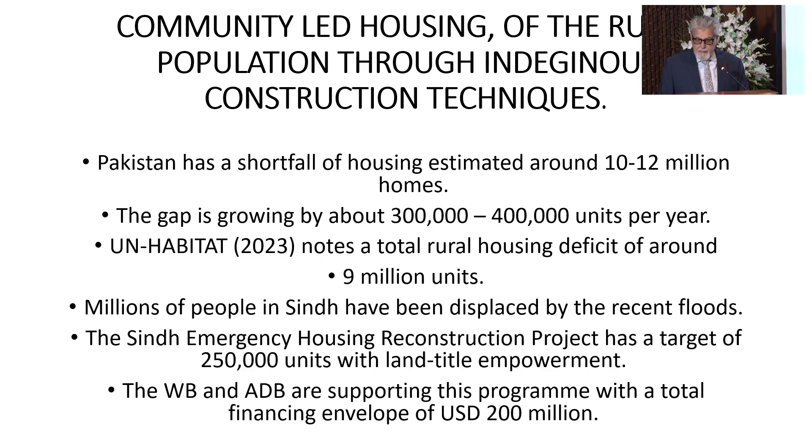As these figures show you, we are in a position in Pakistan where the housing problem cannot be resolved by either government or the private sector. It has to be resolved, if there is to be a resolution, by the people themselves. And that is what we do.

We try and train them to build in the way that they understand. I will come to it in a minute, but the basis of our work is to do with earth, the use of earth.

Please forgive me, a lot of these statistics that I'm showing you, most of you already know. It was intended that there would be more government officials here, and certainly more students. But whoever is here, it is intended for them, because most of you know the things I'm mentioning here. But really, it has become imperative, as far as I'm concerned, that we have to change our attitude.

We have to change the way we think. As far as my profession is concerned, we have to start to listen more than to say that we know the solutions. Because the solutions are there. We need to look for them.

And I'm constantly finding those solutions, not through my education, not through my workload, which I'm still doing, but when I talk to the people in the rural areas, and I've been doing this for the last 20 years, I'm amazed as to their knowledge. And why don't we listen to them?

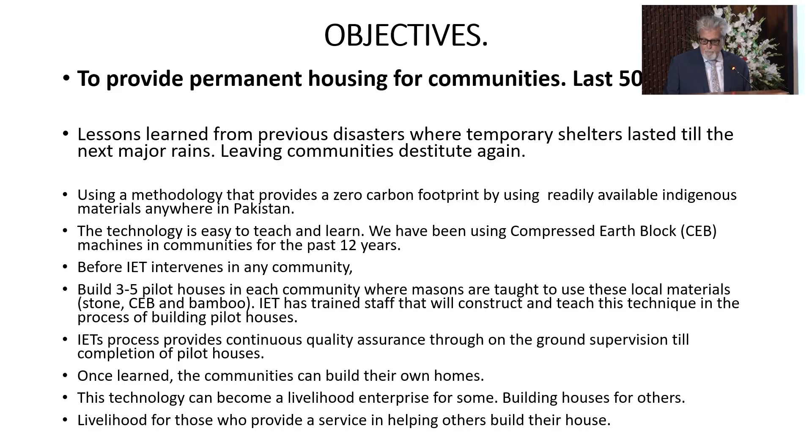A CEB machine costs about 160,000 rupees. It's made here in Pakistan. I've made mine in Karachi.

Interestingly enough, a lot of people don't know, but these blocks have a better PSI strength than concrete. Not only do they have a better strength ratio, their absorption of rainwater is much lower.

I haven't used any scientific techniques to measure the temperature difference, but I've used thermometers indoors and outdoors. From the buildings we made, we recorded around 15 degrees, and in some cases 18 degrees difference between the outside and inside temperature using this material.

I think you've read most of what I've put up on the board. I don't think I need to go past this, but I'm very keen in our organization to head toward a zero carbon footprint, both in my architectural work and in this NGO work. In my architectural work, I haven't really succeeded in making it zero, but it's pretty close. Certainly in the NGO work that I'm going to show you, it is zero.

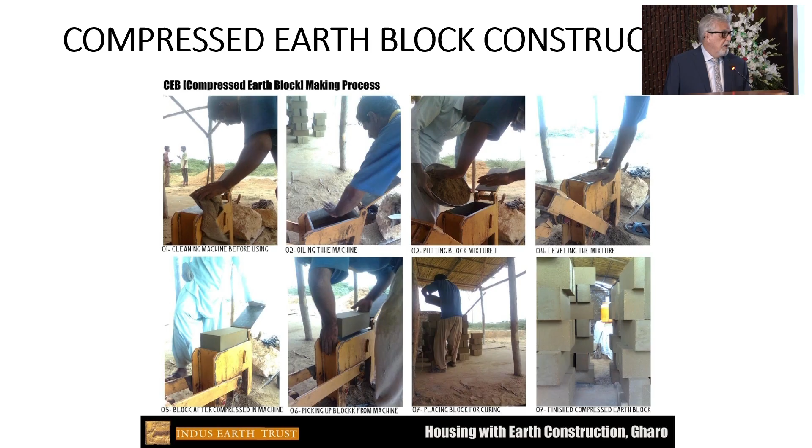We are actually building these in the Gharo wind corridor. As some of you might know, this is the area where all the wind turbines are being placed to provide electricity for the country. So you can imagine the wind that blows here is very high, especially during storms.

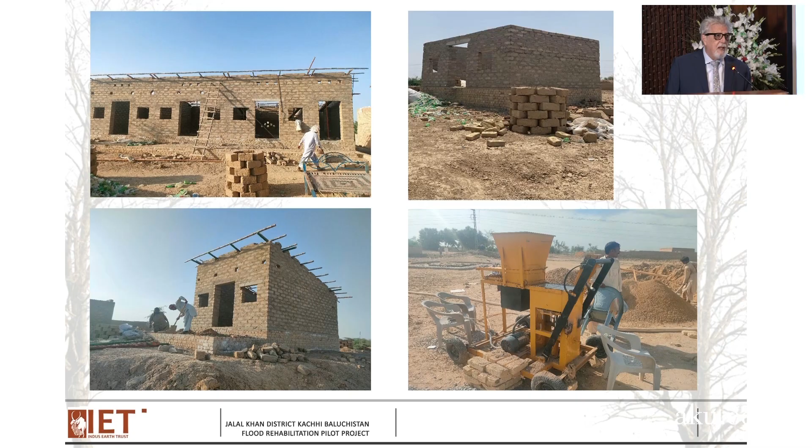This is the result of the building you just saw. We use lime plaster. The lime actually reduces the heat gain inside the building to a great extent. Here are some examples of the use of this material.

As I said, we are really training people to build their own houses, and I am convinced that is the route to take to help resolve the housing problem of our country.

The materials you need are cement, and not much, as I said, only 6%, a Panaflex sheet for waterproofing, and Bujri, which is the earth material. And the labor is your own, so it's free.

If we are to build, and I will show you examples of what we've done, the cost would be obviously much higher because we will be employing us as contractors. But now, over the last 15 years, I have noticed that these people we've trained are building their own houses, especially in Balochistan.

Here's an example of a model house that we built, 800 square feet, all using CEB blocks, stone foundation. It's 3 feet high to prevent flooding.

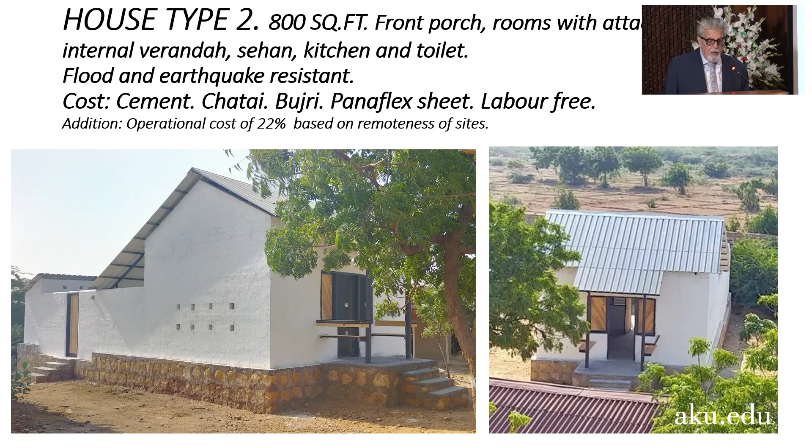And the roof was donated to us by a steel company. They wanted to experiment to see how it would work. This was a new product which we gladly used. But actually, in all our other works, in the example I showed you before, we don't use steel at all. This is the plan of the building you've just seen.

Talking about learning, we initially started building houses with 2 rooms, and I thought you'd have 1 room as a bedroom and 1 room as a living room. But we certainly learned that this is not acceptable to the communities. They only want 1 room - the entire family lives in 1 room.

They want to have a veranda, yes. And you can see - does this work? I'll use my own pointer. When you want something to work, it doesn't work.

You can perhaps see the main room where the beds are shown, and to the right is the veranda, and then what we call a sehen, which is an outside area - we call it a courtyard. This is the veranda, this is the main room here, and this is the sehen. Outdoor toilets, and an outdoor kitchen. I have seen many proposals being made by

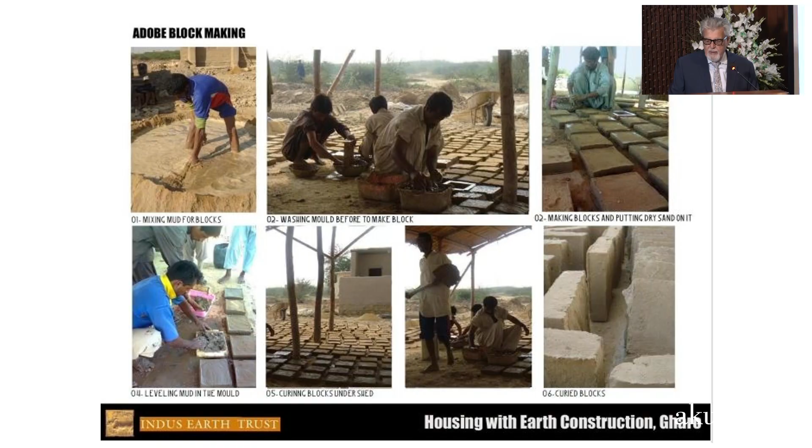This is being built - this is the two-room house, which we've now converted into a one-room. But it is adobe construction, and it has plastic sheeting on the top to prevent the heat from hitting the roof. Unfortunately, it was blown away by one of the storms that I mentioned to my colleagues earlier this morning, because they're doing the bamboo covering on the houses in Karachi.

This again - these are experimental houses. As I said, they are still standing. So as they say, the proof of the pudding. These, by the way, were built by the community. What we did - drawings are not understood by the community, and hardly surprising, so we made models, and the models were the ones that they understood and were able to apply.

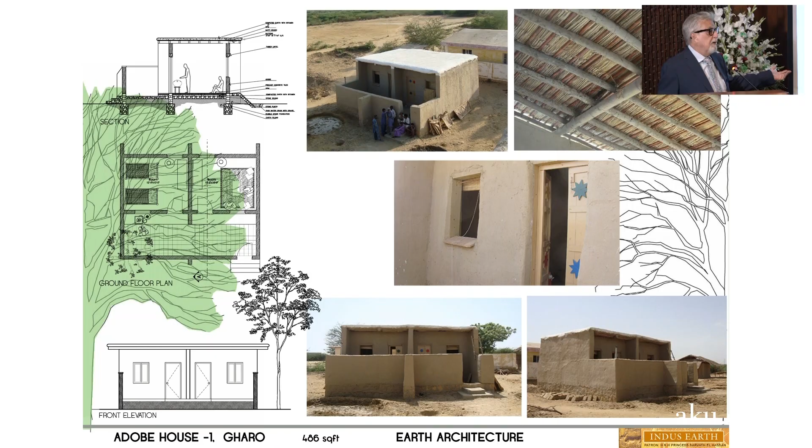You can see that the white roof, which is made of lime, is to reflect the sun's heat off. Because this was a part of the roof, all these materials are bought in the market. Nothing is imported. This is bought local timber, local bamboo, local chatai, as we call it. Even the windows and the doors are made locally. Now, we wanted to make sure that we didn't import anything from outside. When I say locally, these houses are built in a town called Gharo, which is about 1.5 hours from Karachi, east.

As was pointed out by Dr. Zahra yesterday, she has spent so much time in making a document that says that you can do it without the use of concrete. But then as she showed the example, it was ignored. Am I right? They just ignored it, and they built a concrete building next to one of the examples that you shown. And I think in front of you, I spoke to the government official, and I asked him, why do you ignore people who have spent so much time in doing research and coming with an understanding?

And he just gave me the usual political answer. I'm sorry, I'll just speak in Urdu.

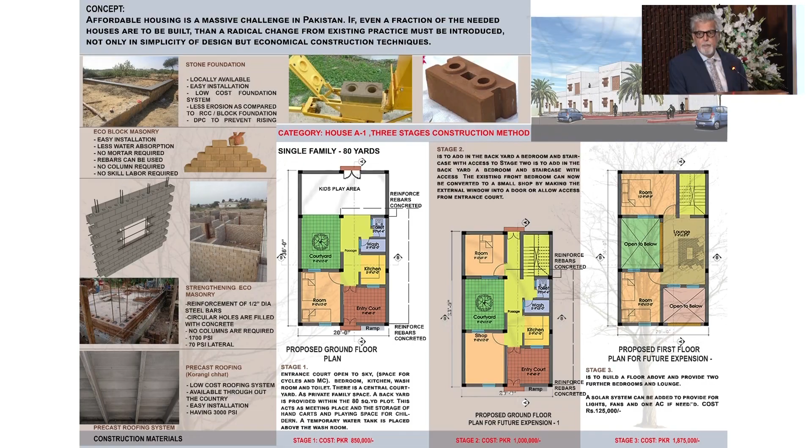And this is our impression of what it might look like. This is what it looks like. This is another example of the same, using similar techniques. This is an example of rammed earth.

We wanted to show that there is a way of doing rammed earth by the community themselves. This was something they did not know, something new. Here's an example of rammed earth in Nepal.

Here's another example of what we just recently completed in the rural areas, using compressed earth blocks, and bamboo as a material for the roof. The interior of this is 6 years old, or what it looks like inside. Bamboo has to be treated properly. The obstacles, there are no technical issues. The obstacles are not purely, but primarily psychological.

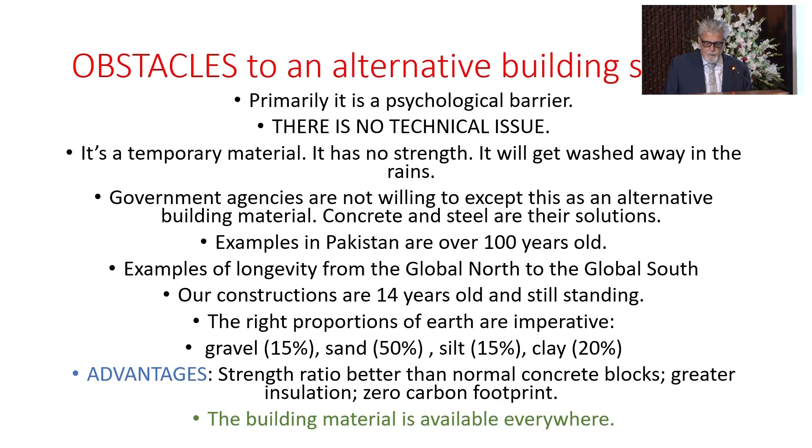Well, I've already mentioned the advantages. We did, I think, because of the floods, an example of what could be a floating house.

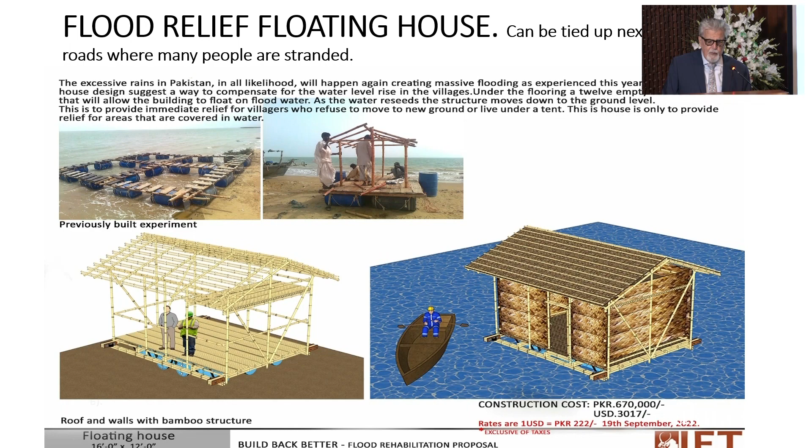I just want to very quickly show what we did in Kashmir, in the earthquake in Bagh, which is about 4,500 feet high. All our buildings were rejected by the government because we weren't using concrete. But we reused the existing buildings that had collapsed.

And if I can just show you, the earthquake issue is in the corners. The major issue is the corners, and therefore we really concentrated on that. This is the completed building, just using the stone that was available there.

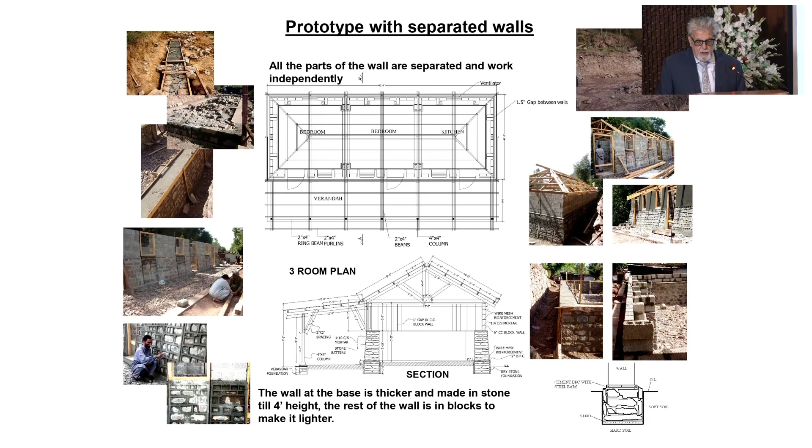Another type, that's what it looks like. Very simple design, nothing complicated, because the idea was the community will build themselves.

This is a very important slide I wanted to show, especially for those in a technical frame of mind. The stone was never placed in a way where it could slide off, but always placed so that if the pressure of an earthquake took place, the stones would move inwards.

Whether our examples work or not, as I've explained to many government officials, God forbid there is another earthquake, but we'll find out then. This is another example of it. Thank you very much.

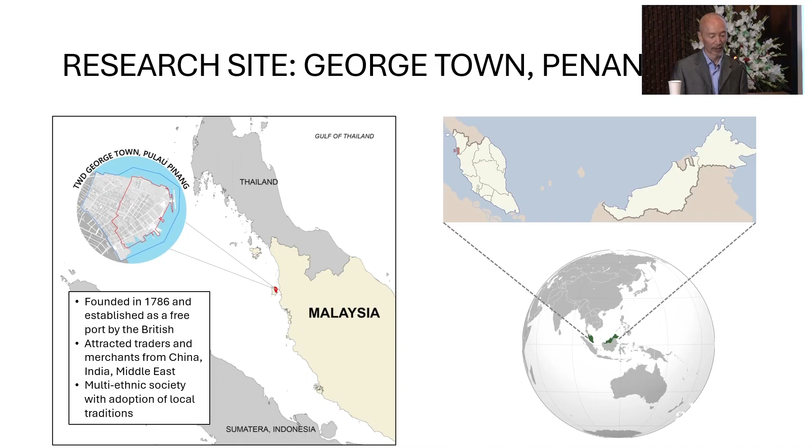And that was important when UNESCO listed George Town as a World Heritage Site in 2008. There were 3 main criteria that met: cultural diversity, the history as a historic port town, and of course the architecture and built form.

So our first problem here: there are two related problems, and Penang's problems are really also the problems more widely in Southeast Asia, as noted by the Intergovernmental Panel on Climate Change. Southeast Asia is going to be one of the three hardest hit regions in terms of more extreme weather events, flooding and heat waves, as well as the impact of rising temperature.

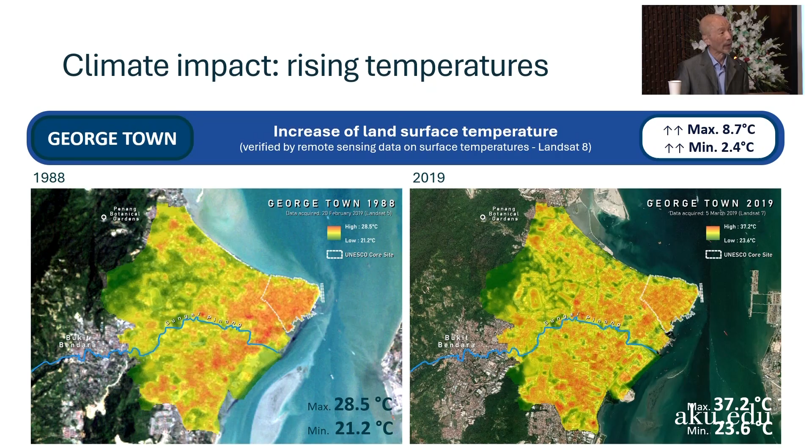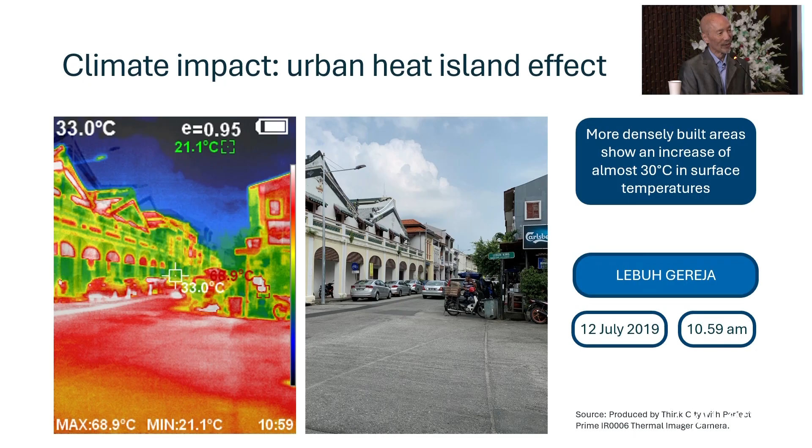I think what's really interesting here is that when you remove the trees and you have the urban heat island effect, the road temperature is 68.9 degrees. That's an almost 30 degree increase in surface temperatures. I don't think it takes a genius to work out what needs to be done if you want to cool down a city.

Now, when I talk to my friends in South Asia and they look at Malaysia, they go, wow, 30 degrees, 33 degrees, that's nothing when you're looking at 45 degrees upwards. But what I want to introduce here is the idea discussed earlier, of wet bulb temperature, which combines air temperature and humidity to indicate heat stress.

The way the human body works is that we sweat to regulate our temperature. The higher the humidity, the more we sweat, but up to a certain point, when the humidity is too high, our sweat can't evaporate, which means our body can't cool itself.

So what we have here is, if you look at 33 degrees temperature, and you look at 95% humidity down here, that really is the equivalent of 57 degrees Celsius, which is highly dangerous, and 35 degrees Celsius is really the threshold of human survivability.

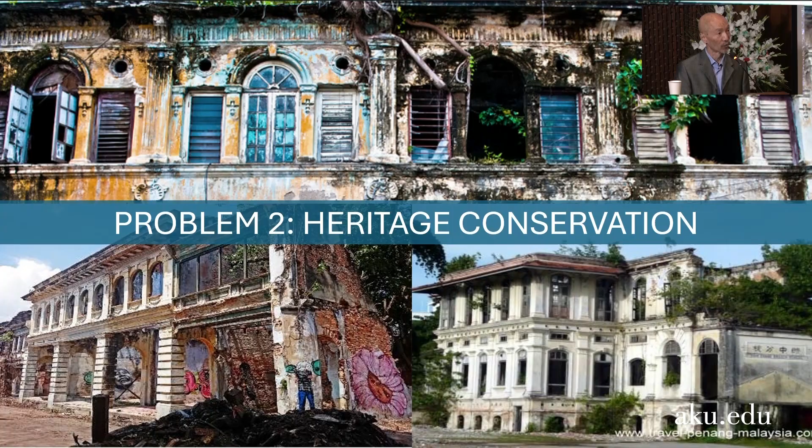This gives you a context of Southeast Asia and the tropics and why wet bulb temperature is very different from dry heat. So the second problem we have is that of decay and neglect in parts of George Town with a lot of heritage sites. The third problem we have is the availability and suitability of building materials to restore these sites.

Often building materials are not suitable because they're modern and not compatible — they don't breathe, for example. There's a limited choice, and where there is material available that is locally sourced, it's often not of sufficient quality.

So the project itself is funded by the British Academy. The British Academy, for those who are not familiar, is the UK's national funder for research in the social sciences and humanities. This particular fund was on culture, heritage, and climate action, hence the connection with harnessing heritage.

It's also part of the UK government's official development assistance, aimed at engaging with scholars, government, NGOs, communities, and other stakeholders to really come up with policy-relevant research and to embed these research findings. In this case, the aim is to demonstrate how culture and heritage can create opportunities to enhance climate adaptation and mitigation.

So now I need to show this slide because, as Anna mentioned, I'm a political economist, so I'm really a fish out of water here.

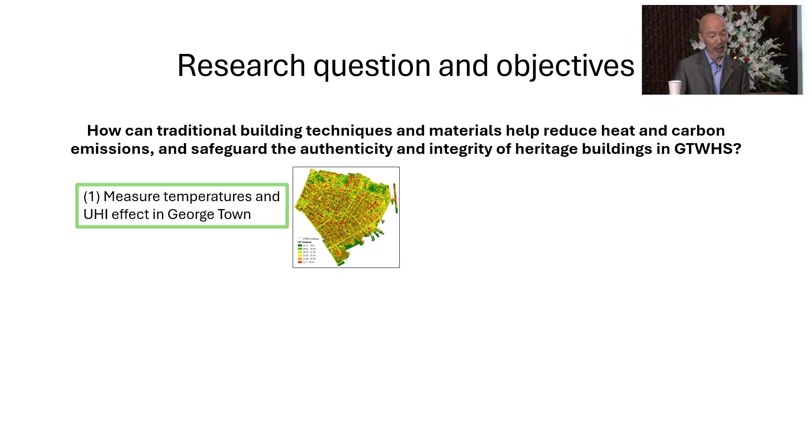To answer that, we've got 6 objectives in total. The first is to measure temperatures and the urban heat island effect in George Town. To compare the temperatures of traditional versus modern materials. Then we assess the carbon footprint of traditional materials - this is when the stuff goes to the lab. We document traditional building practices and whether this knowledge is still widespread or dying out. We identify challenges in adopting this by engaging with various stakeholders, particularly in industry. And finally, we assess the economic viability of traditional materials and techniques and how viable it is to propose this as a solution.

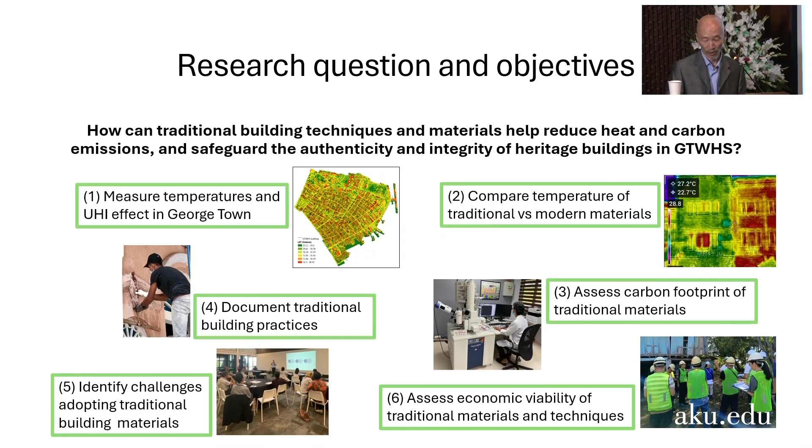This gives you an idea of the different components of each of these objectives. I'm just going to look at 3 findings - I'm not going to touch on the stakeholder engagement and focus group discussions. I just want to look at temperature and carbon emissions, traditional building practices, and economic viability.

I showed you some earlier heat maps of Malaysia, of Penang in George Town. What we have here is we were able to downscale the land surface temperatures and zoom in street by street. This gives us a temperature error of just around 1 degree in terms of residual errors, and also an accuracy within half a meter. So we can see here the hot zones in George Town - the map on the furthest right - has expanded in areas with recent development, and we can actually track this.

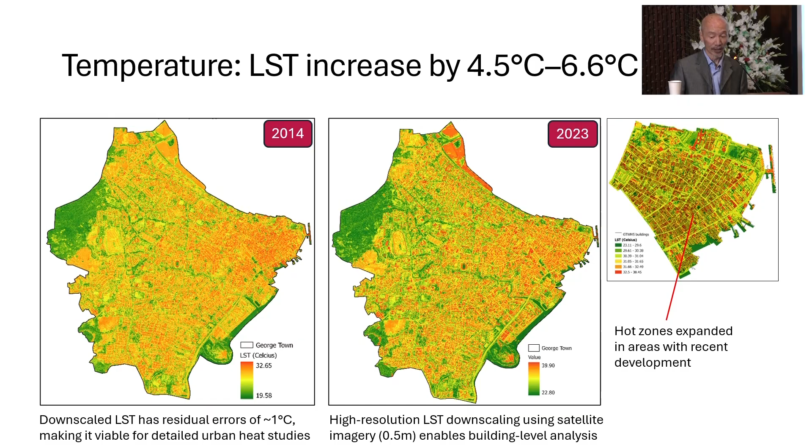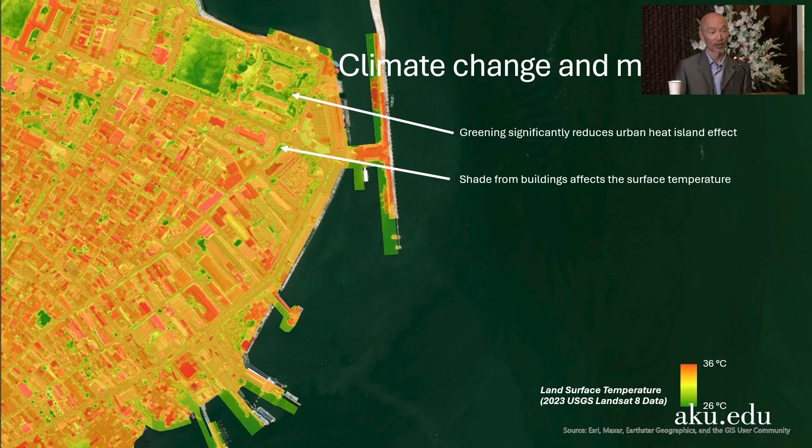Here you can see the importance of some of the issues I raised earlier from this more detailed map. You can see that greening significantly reduces the urban heat island effect. Shade from buildings affects the surface temperature. Interestingly, the asphalt surfaces, roads, were surprisingly cooler than rooftops - rooftops were where the highest temperatures were.

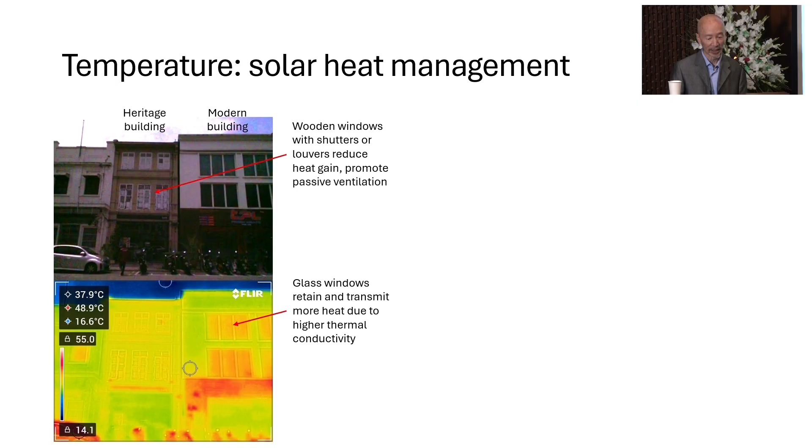So here, this is some thermal images of a heritage building in the middle and a modern building on the right. You can see from the heat map, the thermal camera, that wooden windows with shutters and louvers actually reduce heat gain and promote passive ventilation, in contrast to the glass windows that retain and transmit more heat due to higher thermal conductivity.

This one gives you - this was a restoration undertaken by Think City of a historic fort in Penang, Fort Cornwallis, a British fort, obviously. You can see we're comparing temperatures on the facade of storeroom 7 compared to storeroom number 8. Storeroom number 7 is legacy cement - previously it's been resurfaced with cement - and storeroom 8 is with lime plaster. You can see the green and the blue - blue is cooler than the green.

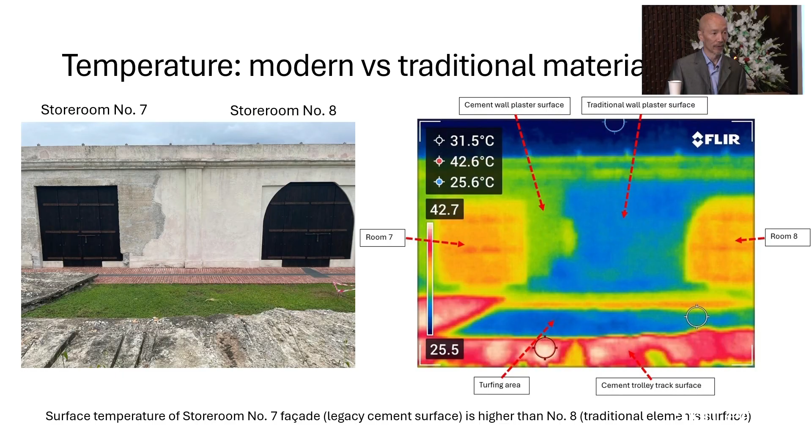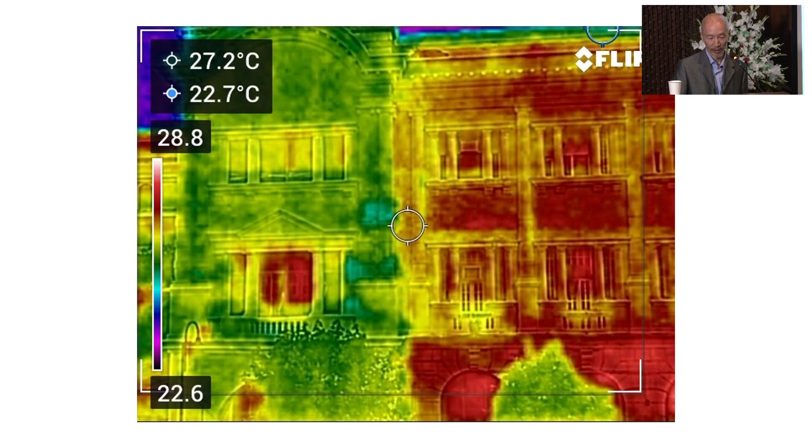Given the range of measures, it was not possible to capture this in one slide with all the various measures, which would be really confusing. So what we did was set the material that scored higher—in this case aerated concrete blocks versus clay brick blocks—at 100%, and the lower-scoring material was measured as a percentage proportion of that 100%.

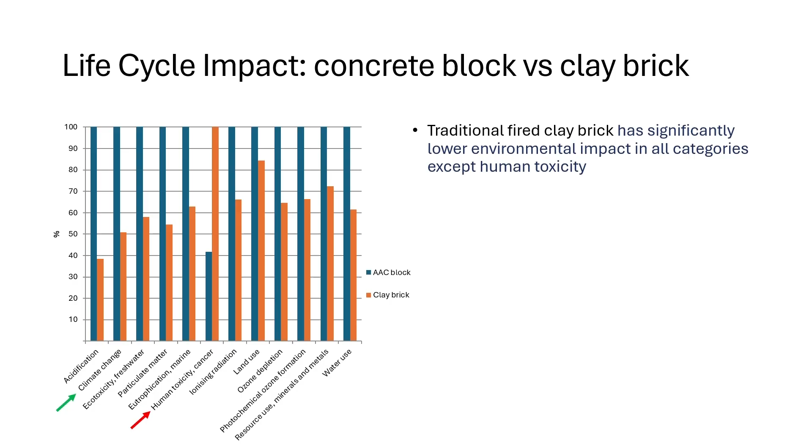What you can see here is that traditional fired clay brick has significantly lower environmental impact in all categories except human toxicity, shown in red. The key indicator, if you want to look at just one, is climate change, shown in green. You can see the difference: clay bricks are almost half the impact of concrete blocks.

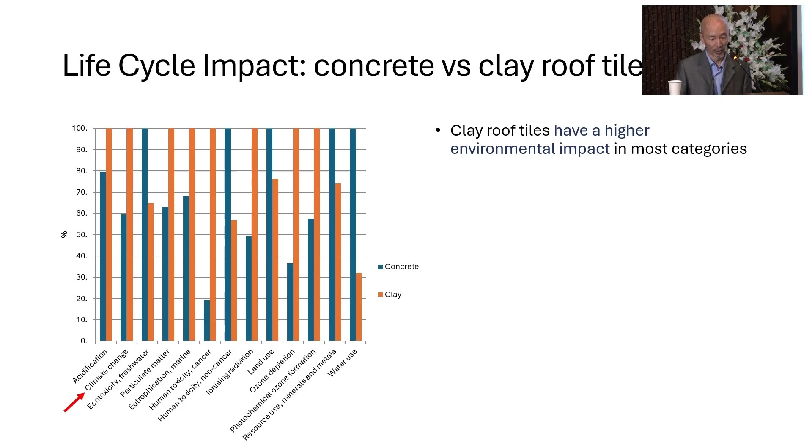Finally, and this is something we're still working on, clay roof tiles have higher environmental impact in most categories compared to concrete roof tiles. This was interesting to us, and the project is continuing—it's meant to finish in December, but we're going to extend it till March just to wrap up a few of these things.

After sampling and testing each building material and measuring them, we wanted to model this and simulate it. So we used a software called IES Virtual Environment Simulation, and we created a 3D model where we could input the various materials to get an indication of how this building will perform.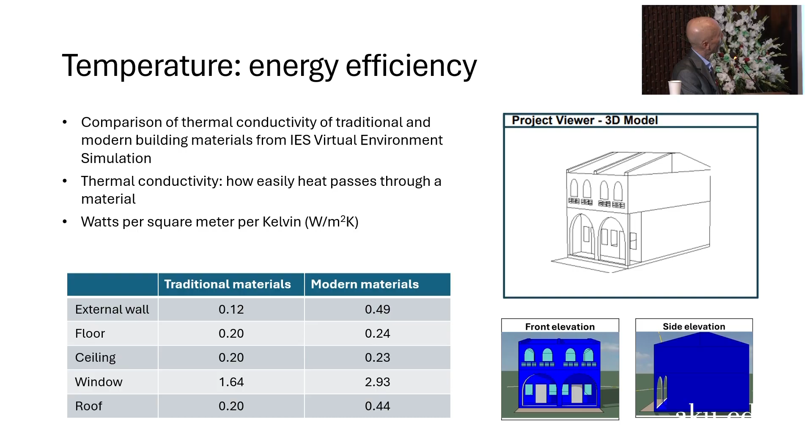Here's a summary of the U values, the thermal conductivity of traditional versus modern materials. The less conductive the material, the better it is at regulating temperature, preventing heat from outside coming in and heat loss from inside going out. In every instance—external wall, floor, ceiling, window, and roof—traditional materials have lower thermal conductivity than modern materials.

We can see the energy consumption is lower for the black curve, which is the traditional material, which only peaks at about 1.2 kilo British thermal units per hour lower than modern materials.

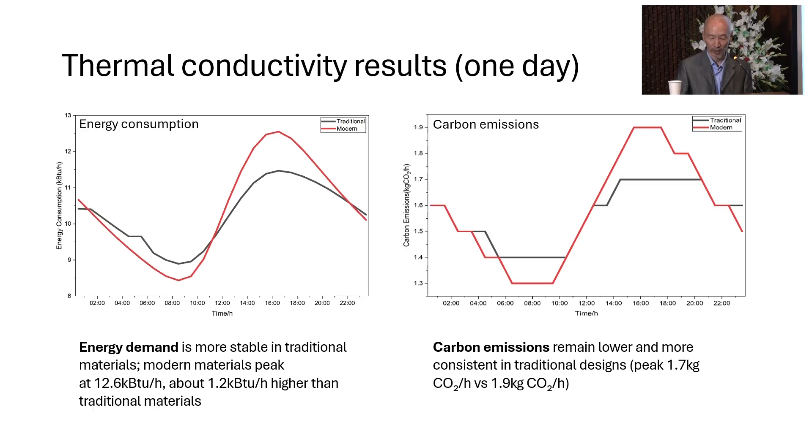For carbon emissions, this is key—the black line, the envelope, is much smaller than modern materials.

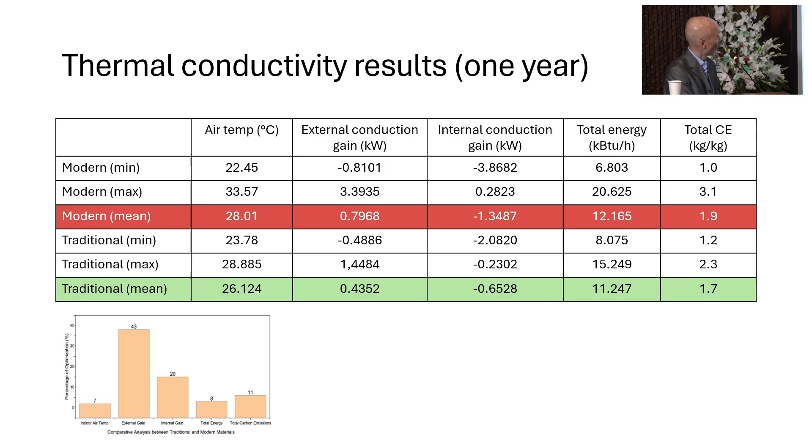Finally, we did a one year simulation—those earlier charts were one day. For the one year simulation, you don't need to look at the minimum or maximum, just the mean for modern and traditional across five categories: air temperature, external conduction gain, internal conduction gain, total energy, and total carbon emissions. In every case, traditional materials score better. This chart gives you an idea of the scale of improvement gained by traditional materials, the highest being external conduction gain at 40%.

So what are the challenges then? Obviously what we want to do is empirically record these things so we can take it to government to say these are the issues. We also conducted surveys, and the challenges fall into three categories: construction, governance, and finally institutional as well as local knowledge. The big problem, and hence my question about scaling up in the previous presentation, really is the higher costs.

That is always the big comeback, the big pushback by contractors, conservation architects, etc., that it costs more to use traditional materials, as well as there's a lack of skills. Traditional materials are also more time-consuming - you can pour cement on the floor and let it settle, which takes no time at all. With lime, for example, you need to flatten it. So more time means higher costs, and also workers lack practical experience.

In terms of governance, there's a lack of public sector capacity, a lack of policy enforcement, and lack of formal guidance by government. There's also the problem of safety regulations that prevent the use of timber, because the fire department in particular would not approve constructions from timber. And there's also the general attitude that having to comply with greener technologies, traditional materials, is just a hindrance to completing the project.

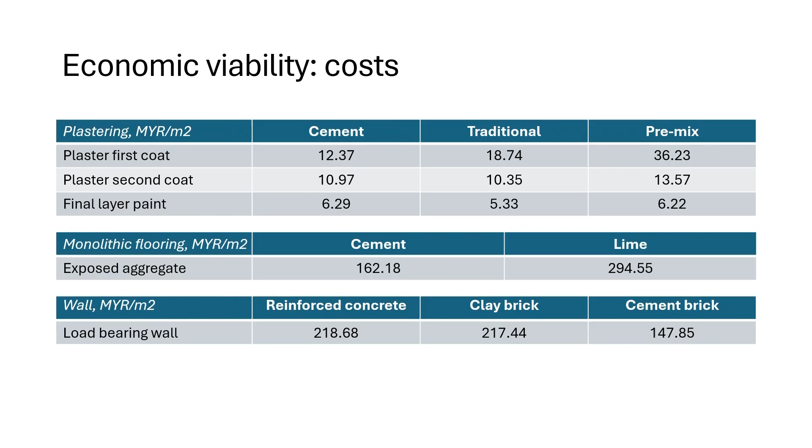Finally, we come to the data on economic costs, economic viability. This is the pricing per square meter in Malaysian ringgit, MYR. We've got selected costs for building - plaster coating in different layers, flooring, and load-bearing walls. You can see that although traditional materials are more expensive in some instances, in others they are very close, and in others yet, say the final layer of paint, they're actually cheaper. These premixes tend to incorporate more environmentally friendly materials, but also include cement, so they're not necessarily greener per se.

When it comes to load-bearing walls, you see clay brick is comparable to reinforced concrete, but once you compare cement bricks, then that becomes a problem. It doesn't make sense for any project to want to use clay bricks.

What we're doing right now, and this is where I come in, is trying to do the full economic costing, which covers the life cycle of materials. So building from cement bricks may be cheaper, but that's because the full cost of cement bricks isn't included in this price. That means at the end of the life cycle of the building, it needs to include the cost of the landfill, whereas clay bricks can be broken down and reused, or biodegraded.

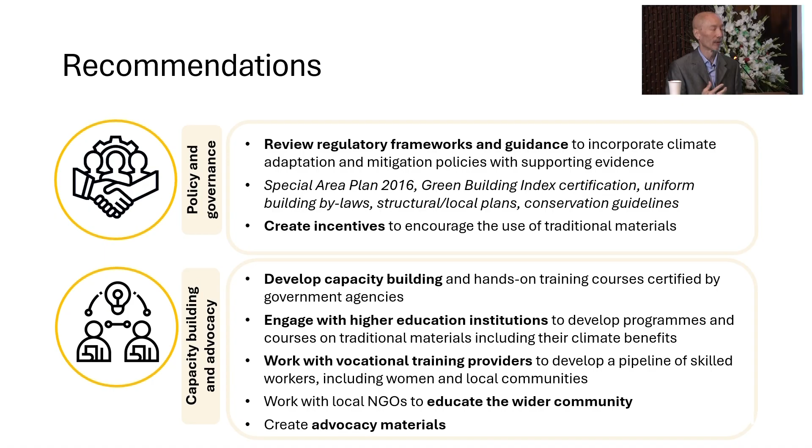Then, of course, the whole issue of capacity building and advocacy. I fully agree that things need to happen from the ground, but being an economist, I also think we cannot disregard government - I don't think any of us is saying that. In fact, the listing of George Town as a World Heritage Site was through the work of local community and government pushing for it, as a way to rejuvenate the entire city and make it a living, breathing city. And that's it. Thank you.

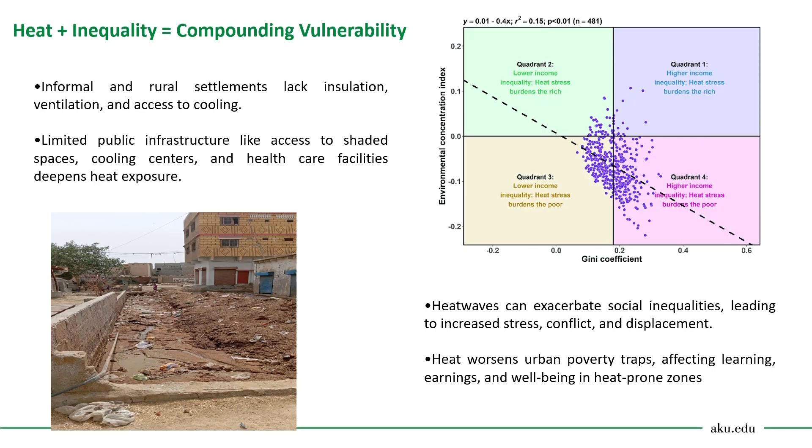I wouldn't spend much time here. We have been discussing since yesterday how heat waves are increasing in severity and intensity, and how Pakistan is one of the most affected countries in the world. On top of these increasing heat and climate hazards, the existing inequities that Pakistan has in terms of socio-demographic factors, poverty, and food insecurity all lead to compounded vulnerability, especially for the most vulnerable populations, which includes women, children, elderly, and outdoor workers.

When it comes to the context of Pakistan, the vulnerabilities vary both in urban and rural areas. In rural areas, people doing agricultural work as outdoor laborers don't have much shade. They work in peak summer times, especially in Sindh or Punjab, where the temperature goes as high as 45 degrees for quite a few days, and even in some regions touches beyond 50 degrees Celsius.

But the story is no different in urban areas, though it has its own challenges, because of how these cities have grown, or mushroomed, over the years. Especially in Karachi, single-story buildings have now become 3, 4, 5-story buildings without proper planning. The streets have narrowed, there is absolutely no ventilation, and on top of that, there is no electricity.

Professor Nausheen presented to us this morning the picture of Karachi, showing how these dwellings currently look - people living in 400 to 500 square foot apartments with no electricity, no ventilation, and especially women who are trapped in these apartments, and on top of that, they are also cooking during peak summer times.

As I mentioned, this is the SHAPES trial, and because we started our work in climate not very long ago - just 3-4 years - we are still learning throughout the process. As part of this trial, we had an exhaustive formative phase with various components, which helped us understand what could be done, or at least tried and tested, in both the urban and rural contexts of Pakistan.

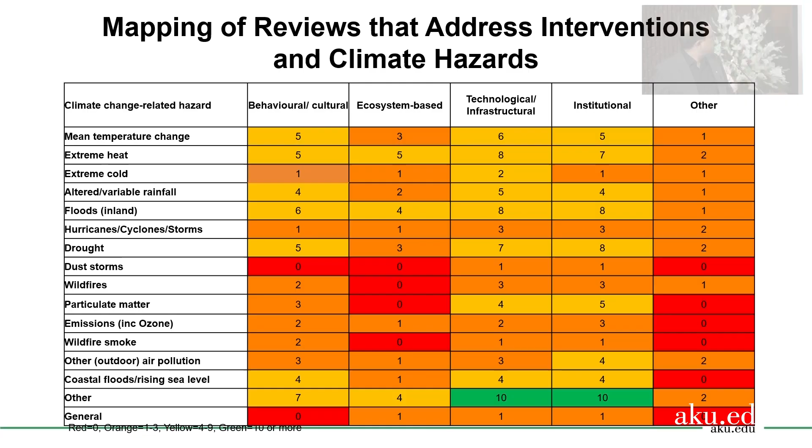But when we looked at what are the possible strategies which could be adapted in our communities to make them more resilient or adaptive to these climate health changes, what we found was that the interventions that have been tested in this space are very far and few.

Most of these interventions have been tested in higher income countries, the global north. When it comes to extreme heat, most interventions tested revolve around air conditioning, whether air conditioning spaces, community spaces, or air conditioning costumes for workers. These are effective, they improve health and work productivity, but they're not feasible in the context we work in because we don't have sufficient electricity, there's the cost, and most electricity still comes from burning fossil fuels, plus air conditioners add to the urban heat island impact.

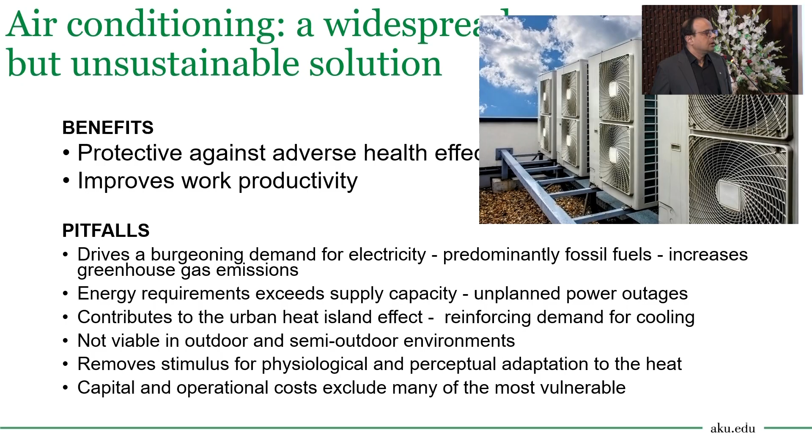A snapshot of Karachi, or any urban city especially in Pakistan, shows that all the green spaces that previously existed have vanished. For the vested interest of a few, we have lost those spaces.

As I mentioned previously, pregnant women are the most vulnerable because they are not free to go out. Men, when there's no electricity in the evening, sit outside on the streets and can wear less clothes. But women are trapped, they cannot go out, they have extra layers of clothes, and on top of that, they are cooking.

We did this analysis over a few days and showed that most women are exposed 24/7 to extreme heat in the summers. There are very few hours, even at night, when the temperature is below the required levels.

We did an exhaustive formative phase starting with a systematic review. I showed you a gap map approach, but we also looked at literature on what could be done, since air conditioning is not a plausible strategy. We found things like reflective paints, shadings, and alternate pavement materials, tested in pilot settings and small studies, which show reduction in surface and ambient temperatures to a variable degree.

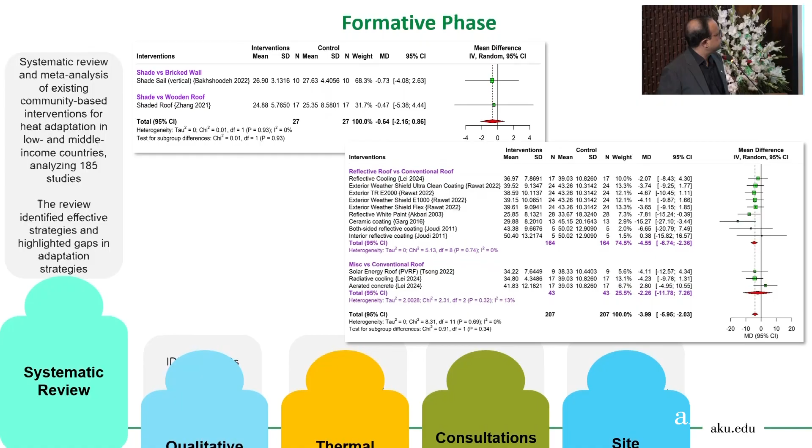Then we had an in-depth qualitative study with discussions with all important stakeholders, more importantly the community themselves, to understand what could be done. We talked to various experts and committee members about what is feasible and what the community would accept and buy into. That exhaustive exercise was done.

We did a thermal drone scanning of both Karachi and a rural setting of Sindh. As Jeff also showed in his slide, there is variability, and roofs are the structures which heat the most. There's so much variability even within a couple of streets of Karachi, some roofs are warmer than others. We tried to understand, with help of our partners, collaborators, and technical experts, the reasons for this.

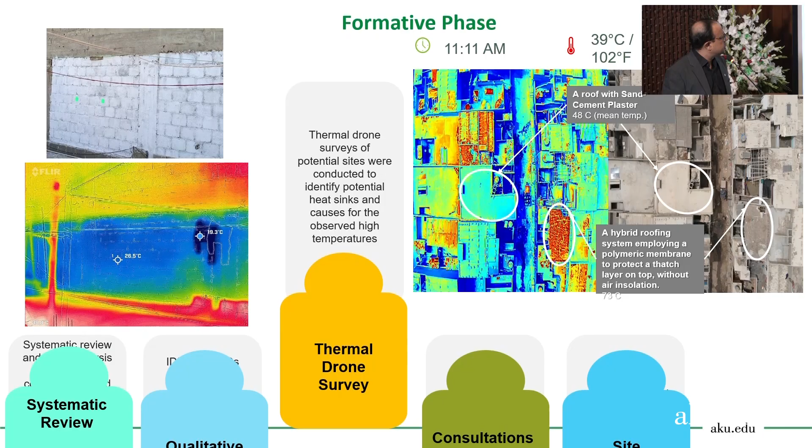As we've been discussing, local materials like mud, if used, have lower temperatures. This is also a slide showing the thermal imaging of a rural village of Sindh, again showing the variability of surface or roof temperatures within a small village.

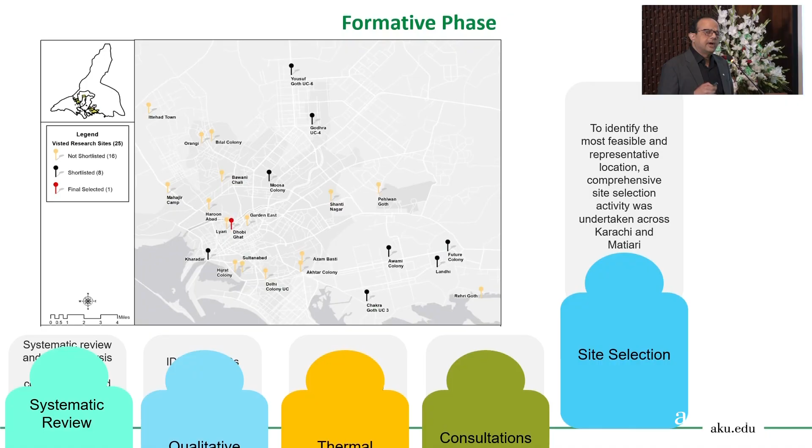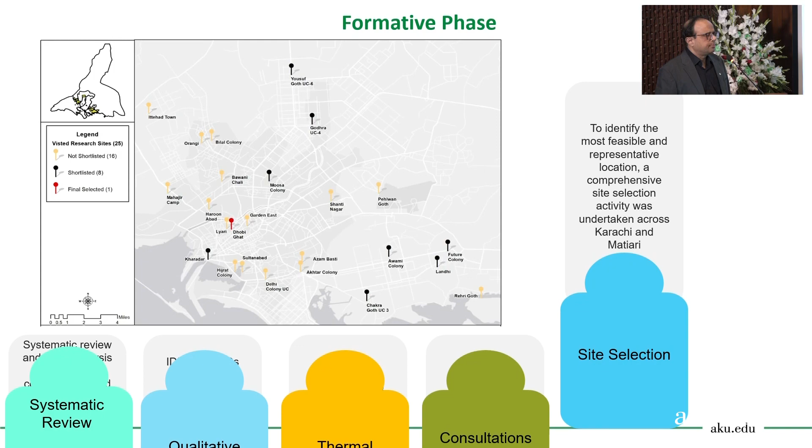As I mentioned, it's a randomized controlled trial, so we have clusters in the intervention group and clusters in the control group. A cluster was defined as any structure having 50 to 70 households. Because we weren't only looking at the impact on ambient temperatures or the environment, but also wanted to see how these interventions affect actual health outcomes and physiological parameters of a subset of the population, in the pilot phase we tested a range of structural interventions.

We've been discussing how experts show that new dwellings could be built to be more climate resilient and temperature friendly for the population. But we wanted to see what could be done for the existing thousands, hundreds of thousands, or millions of structures already there. Ideally you'd bulldoze the whole city of Karachi and build it again, but that's not possible. So we thought, why not do something within those existing structures, and test if interventions could prove effective.

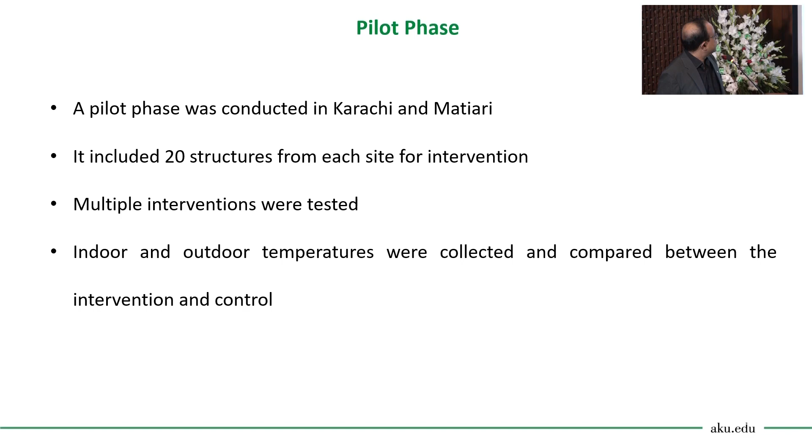So we tested, based on our literature review, qualitative research, and consultations with our collaborators and technical experts, we came up with a range of interventions that we pilot tested in both urban and rural contexts of Pakistan.

In the urban areas we tested roof shading, providing some shade to the roofs, facade or wall shading, and solar panels. One of the main findings from our qualitative studies was that irrespective of what we do, unless we have electricity or fans running 24/7, we would not have thermal comfort in the households we live in. That might not reduce temperature, but at least it can provide some comfort. Then, of course, solar reflective paints and our local variant of lime paints.

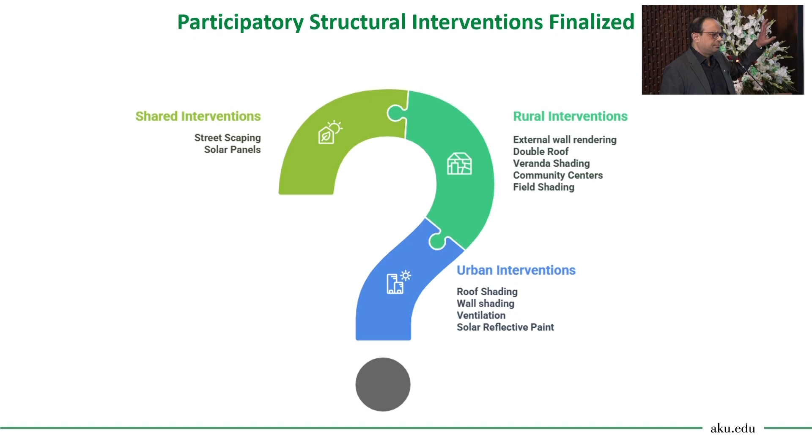We've also been discussing how improving ventilation can impact indoor environment temperatures, and similarly we tested some interventions for the rural areas. I'll take you through some of this in my following slides. Apart from urban and rural, we also tested street scaping, through greening and other interventions. So what did we test in the rural areas?

First was rendering. What we found was that, as we've been discussing, people have now moved from mud to brick houses, for a variety of reasons, one being flood resilience, and it gives a higher socioeconomic status in the community they live in. So people have moved to those brick houses.

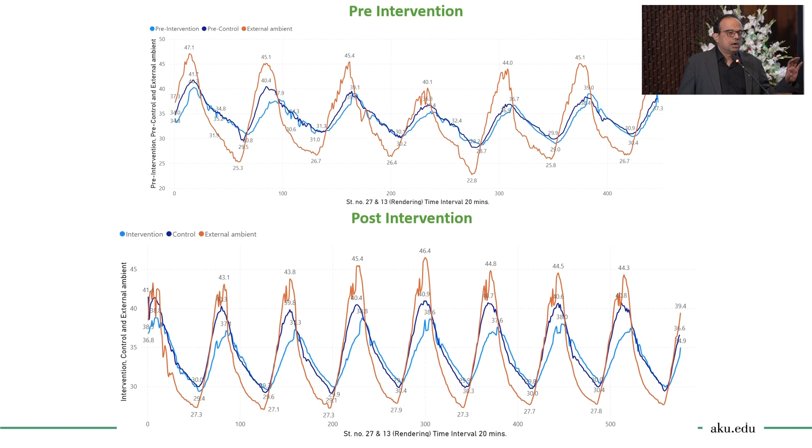It has withstood temperatures, rainfalls, winds, and also provides respite in terms of temperature. So we had serial measurements of temperatures before and after, with intervention and control groups. What we saw was that in peak summertime, there was a 3 to 4 degree difference in the indoor or ambient temperatures of those dwellings, and 8 to 10 degrees difference in the surface temperatures of the walls.

Over a 24-hour period, we monitored this for a couple of weeks, and we saw that the temperature decline was highest during the daytime. At nighttime it was usually comparable, with not much difference between the intervention and control groups, but there was significant decline in temperatures during the daytime.

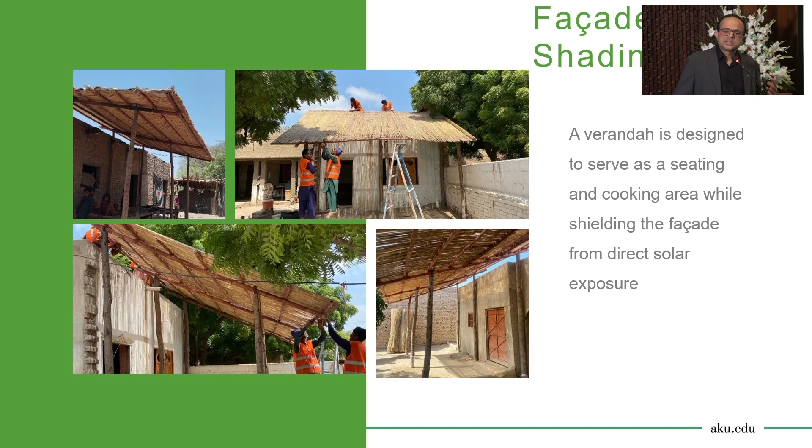One of the other interventions we provided was this facade veranda. This has been inherent to our architecture or living structures but somehow vanished. People now just build one house with 4 walls exposed to sun from all sides. So we created this to at least have the more exposed wall shaded, so there's no direct sunlight, and looked at what impact it could create. Again, we saw a difference in temperature, especially during peak summer hours or peak daytime.

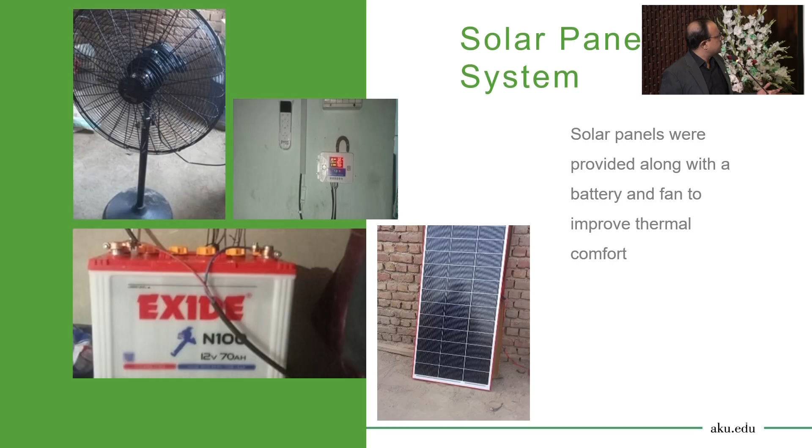One of the things that we also tested was solar panels. We provided a solar-powered battery with fan and light to each dwelling. There was not much difference in terms of reductions in temperatures of those dwellings compared to the control, but I mentioned this was usually done for the thermal comfort and perceptions of the populations.

One of the other things that we tried was this double roof, because most of these structures, although the walls are of brick, the roofs are usually made of mud or clay. So we tried to cover this by a local material. We created a double roof, extended so that it provided shade both to the roof and the walls. At the same time, it reduced the temperatures and reduced the direct exposure of rains and sun to these mud walls and roofs, so we thought it could also add to the longevity of these structures.

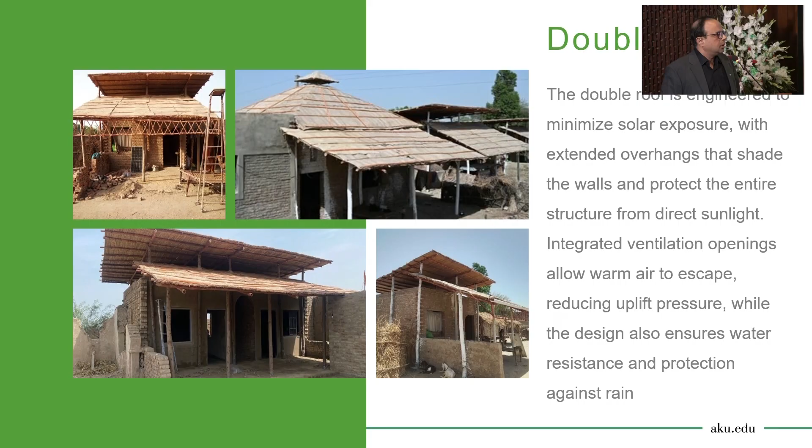So this double roof was created, and we found significant declines in temperatures compared to the controlled structures. Again, maximum declines were in the range of 6 degrees during peak summer time, and the night temperatures were relatively comparable, although low in some instances, in some structures.

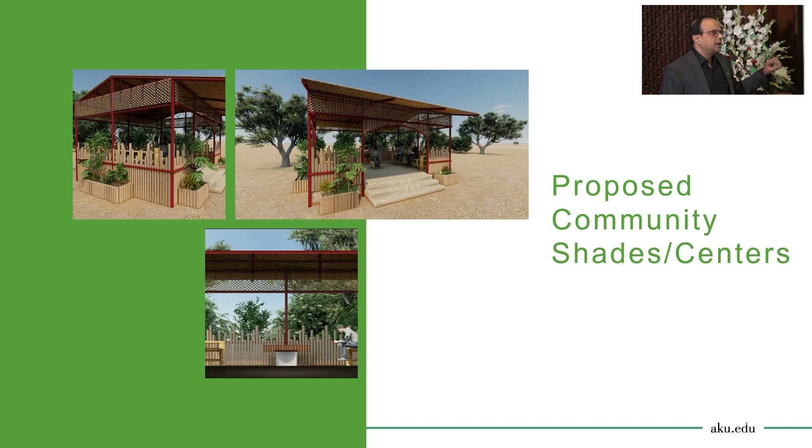We're also planning on doing some community shades, because people who go to the fields, or children walking from schools to these villages, could at least have shaded areas where they can sit and have some respite. There's also availability of water, which could have an impact on health outcomes. So these are some proposals which we still have to pilot test.

We also tested some interventions in urban areas, and again the concept was the same, but you'll see different material being used in terms of the context and acceptability to the populations. We created these wall mount shades to prevent direct sun exposure, especially to dwellings on the 1st or 2nd floor that are directly exposed to the sun.

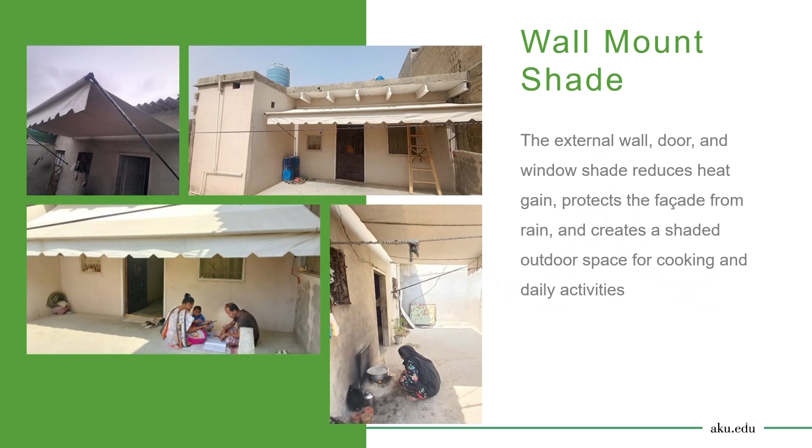One thing we've been discussing is improving ventilation and wind catchers, which was an inherent feature you'd see especially when you traveled to Sindh, but now they have unfortunately disappeared. We found some dwellings, because most of these structures were originally single story, have been informally made multi-storied without proper planning and design. So most structures don't allow us to make modifications because they are weak. But where we found structures strong enough, we installed these wind catchers and also created windows for cross ventilation where possible.

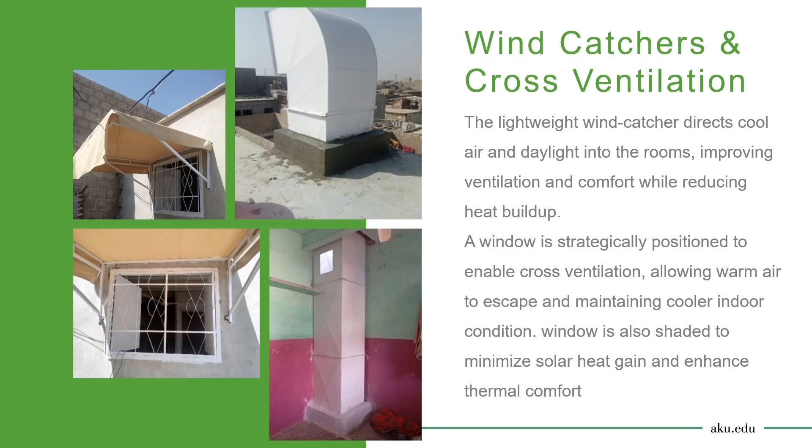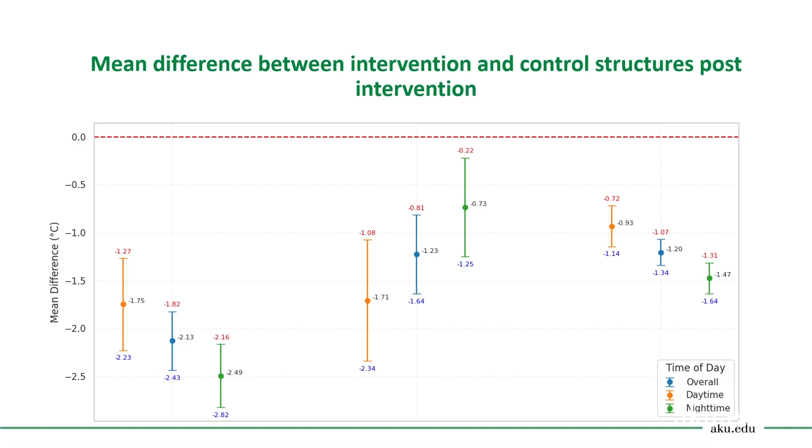We also tried this solar reflective paint and also the local variant, or the traditional variant, chuna. There was not much difference between these two, and we saw a temperature difference of 2 to 3 degrees by applying these solar reflective paints on the roofs of those structures.

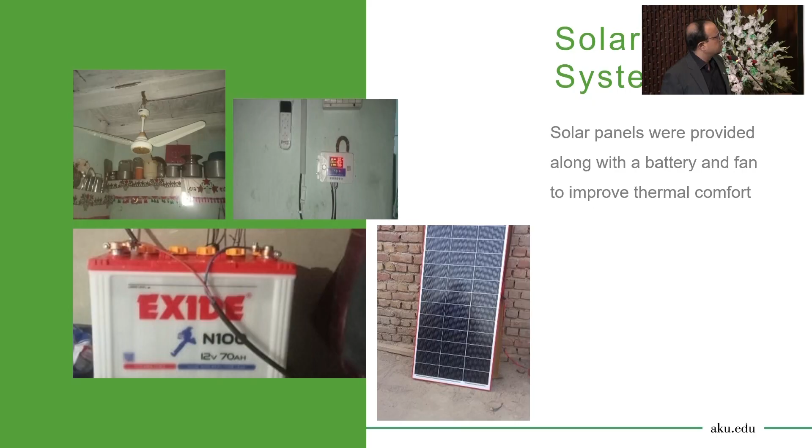Again, solar panel was provided, not much difference in terms of temperatures, but again thermal comfort and thermal feel were something we highlighted. We also created roof shades on the top floor of these urban structures, which provided shade to the roofs and had a greater impact during peak summer time. So these are the 4 or 5 interventions that we have tested in both rural and urban settings.

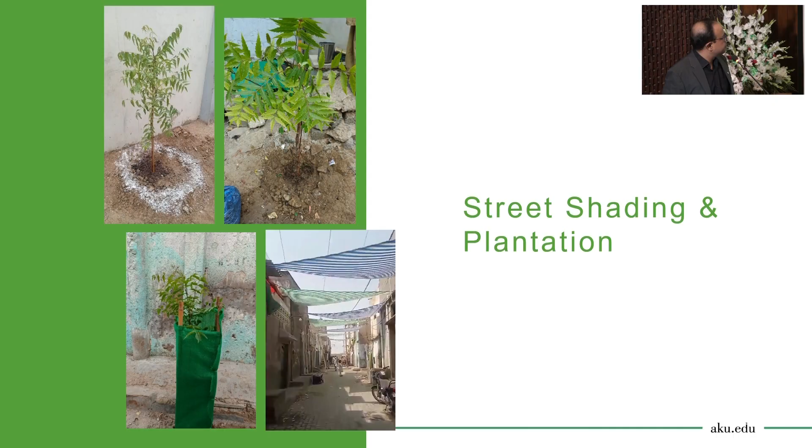As mentioned, we also wanted to do something on the streets, so we tried greening, and as discussed in our previous presentation, we also tried to cover these streets. Initially we did some designs covering the street fully, but that trapped the heat, it was really humid and hot, and when the street was cleaned the dust used to get trapped. So we came up with a design with intermittent coverage of the street with this material, which provided shade to the streets.

We were only interested initially in looking at the impact of temperatures on health outcomes and physiological markers, but something that came to our surprise, which we hadn't thought initially, even in a few pilot interventions and structures we tested, was that this had a greater impact on the quality of life also.

How? Because these verandas that were created, which were not there before, provided additional space to the community. They moved their kitchens, which are usually inside the households where they used to burn biomass, adding to household air pollution. So they moved the kitchens outside and started doing embroidery and other work there. They set up the charpai, the traditional bed, sitting there during the day.

This was something we didn't expect. In some populations, with one additional floor added, people were having family gatherings, barbecues, and other things there. Women who cannot go outside on the streets can at least go to the top of those floors when there's no electricity and gather there for some quality time.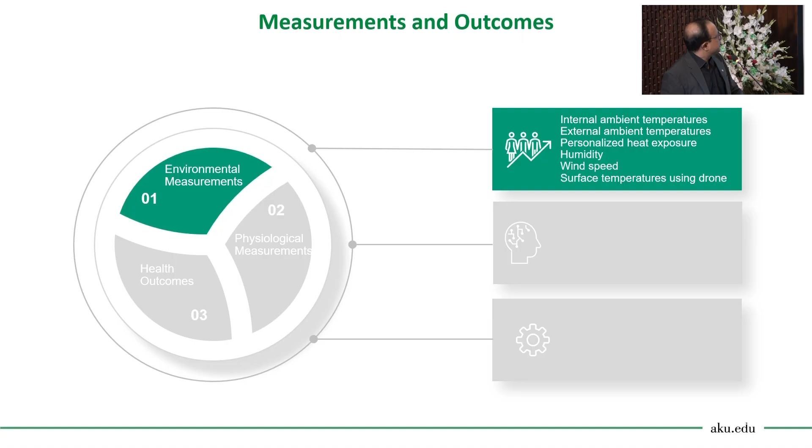So these are the things we are experiencing right now, and maybe this could have a greater impact than we initially thought. Some of the outcomes we are measuring, as I mentioned, include environmental measurements, looking at the impact on temperatures and humidities.

We are also looking at sleep quality, as highlighted in our initial discussions, because temperatures are improved at night. One key indicator linked to poor health outcomes, mental health outcomes, and work productivity is sleep. So if you improve sleep at night, it can have a greater impact, and that's what we are trying to assess in this study.

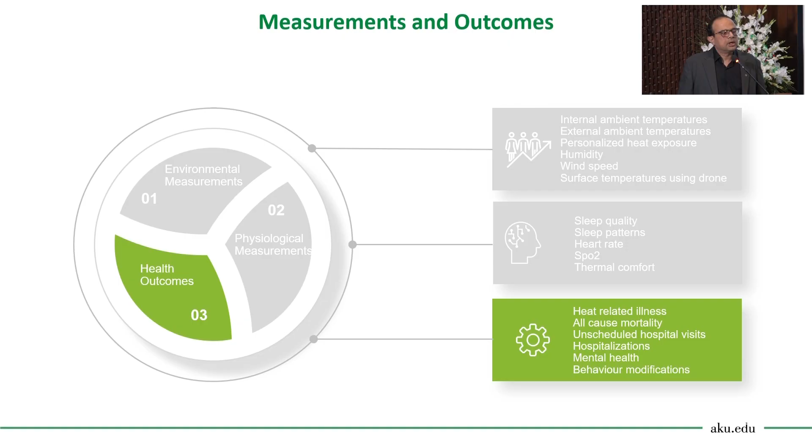We've also given some gadgets to a subpopulation to look at the impact on heart rates and other physiological markers, and we're capturing direct heat-related illnesses, hospitalizations, and visits and mortality. One outcome we've now added based on our pilot study is looking at quality of life, to see whether this improves the quality of life of the population or not.

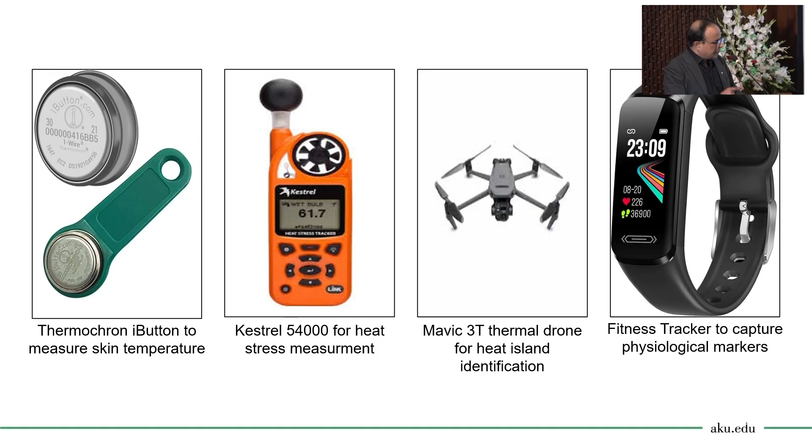Various gadgets are being used, all validated devices, including iButton, Kestrel, and thermal drone cameras. In a subset, we're giving wearable trackers to capture sleep, physical activity, and physiological markers. We have various timelines for capturing data so that we have 24/7 data for these populations during both summer and winter.

The idea is that by next year we would have some results, because starting from January onwards we begin a full-fledged trial with 10 clusters in the intervention group and 10 clusters in the control group, both in urban and rural settings of Pakistan. This trial is statistically powered, so it would give us answers on whether this could have an impact.

One more thing I'd like to add is that for sustainability, we've added a component where the community themselves contribute. We've set a target of 20 to 25%, which could be in terms of financial contribution, labor, or supplies of materials. So they are also contributing, which can add to the sustainability of these interventions.

In summary, I think this Shapes project provides an opportunity to empower communities to stay cool, safe, improve their work productivity, and enhance their quality of life. With this, I'd like to close my presentation, and thank you all for listening.

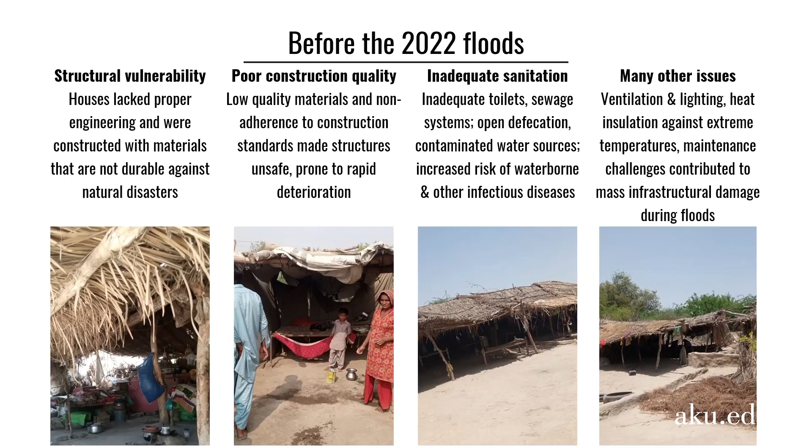So this whole thing we talk about, our indigenous kind of knowledge in terms of what used to be there, that was kind of abandoned. And right now if you go there, these are all just jhompdis in which they are living. You can imagine when calamity hits, what will happen to those, right? Those just got wiped off. And it was just horrible.

That's why, yes, the devastation was bad, but the baseline infrastructure was so bad that everybody just kind of went up to the streets, along the roadsides and all. We did health clinics and all to the places where we could reach. We reached quite a few places, but it was kind of like just putting off fire at the end. So the feeling was, we ought to do better. What can we do better?

Knowing yes, we are limited in our knowledge and skills, but there are people who are very expert in this. And we are wise people, otherwise well-resourced, well-connected. What can we do?

So Yasmeen Lari - somebody heard of her on CNN actually. This kind of was there, that these could be local solutions, zero carbon, very low cost. And she was featured on CNN, and we saw that. We reached out to her - okay, what can we do here?

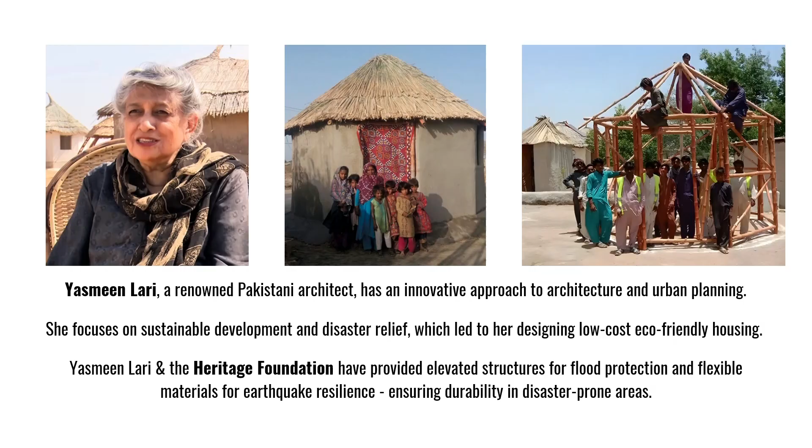And it turns out that this animation was on CNN, and it was pretty amazing that CNN is telling us what is happening right in our neighborhood, in terms of - we looked her up - these bamboo-based houses, these are very close to what our traditional setups have been. They are very strong, earth reinforced, zero carbon, low cost.

So as part of our citizenship there, yes, we were doing research, but we were also doing some social work. We formed a social enterprise, a not-for-profit social enterprise, which was trying to work on malnutrition and other things in Matiari. So we had been doing this work.

So we thought that we could really leverage this. Leveraging this, what we called Sadka Pakistan, this not-for-profit that we had, we got a team of about 10 people who were good in construction, local talent. We got them and took them to Yasmeen Lari's workshop. This was in Thatta. We put them there for about 5-7 days so they could learn how to make these houses and all.

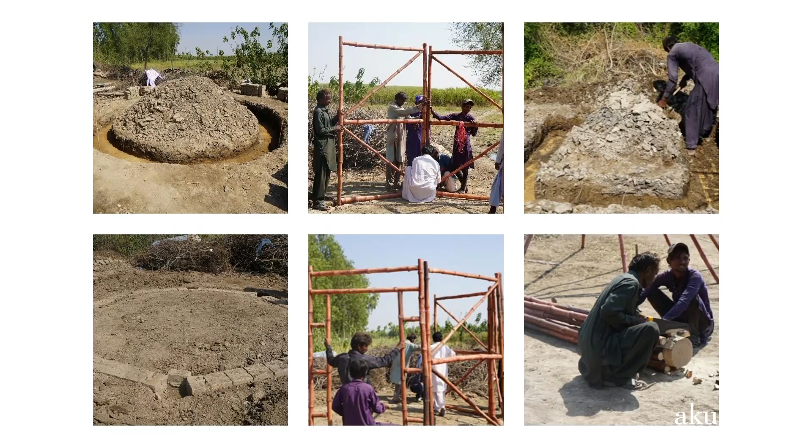So not just the houses, but there were toilets also. She was able to advise how to do those toilets, stoves also. And we brought them back here. We got some philanthropic funding, and we said let's do this and let's see what impact we can make. Turns out that this was remarkably cheap and remarkably high throughput.

So in a month, those 10 people, what you do is you don't do all the work yourself. You do much of the technical work, but a lot of the work is done by the people you are making the houses for. They don't pay you, but they put in the effort, the man hours or woman hours in this case.

They create all those structures and everything. You wouldn't believe how this eventually comes out. There are these octagonal bamboo structures that are all tied together, with earthen mud reinforcing the walls, and organic rooftops on top. You wouldn't believe how much one costs.

One of these costs about $180. In a month's time we were able to make about 60 to 80 houses. So this was a pipeline of 60 to 80 houses. A toilet was about 25,000 rupees, which is about $100. The stove was 500 rupees, which is like $2.

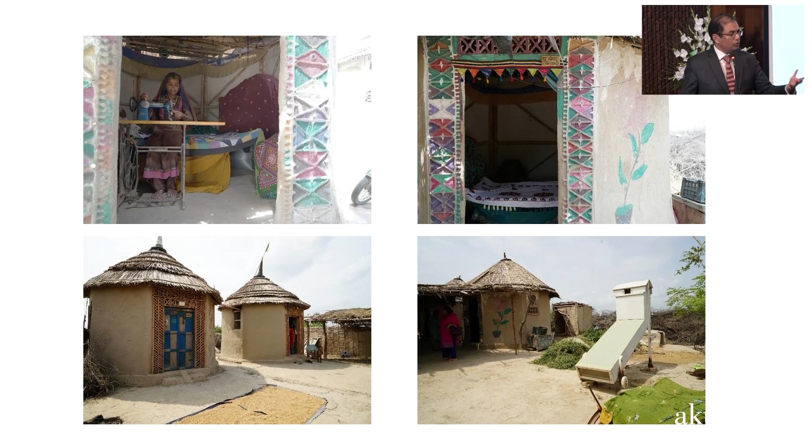Toilets weren't connected to the houses, they were separate, but for every 3 houses we were able to make 1 shared toilet. Stoves were remarkably cheap, 500 rupees, less than $2. In total we made about 750 of these houses.

The key thing was throughput. You can't make one house at a time, you have to make them in bulk, because there was a whole workshop we created in which those bamboo structures were made. If you have enough throughput to make 60 to 80 houses a month, you can do this at that rate, and it's pretty amazing.

This was done as our social effort, but then we wanted to see the impact of it. After a lot of time, we found they survived very high rainfalls and storms that happened afterwards. We knew they would survive, since Yasmeen Lari had advised that this would hold up, and they have survived. But we said let's do a formal impact assessment.

We did a cross-sectional observational study using mixed methods between October 2023 and January 2024, about a year after we built the houses. The criteria covered 12 villages across 2 union councils, after due ERC approvals: 104 women of reproductive age, 52 residing in the eco-friendly housing we jointly built with the people for at least 6 months, and 52 residing in traditional houses, the jhompadis, in the same neighborhood. We measured multiple things.

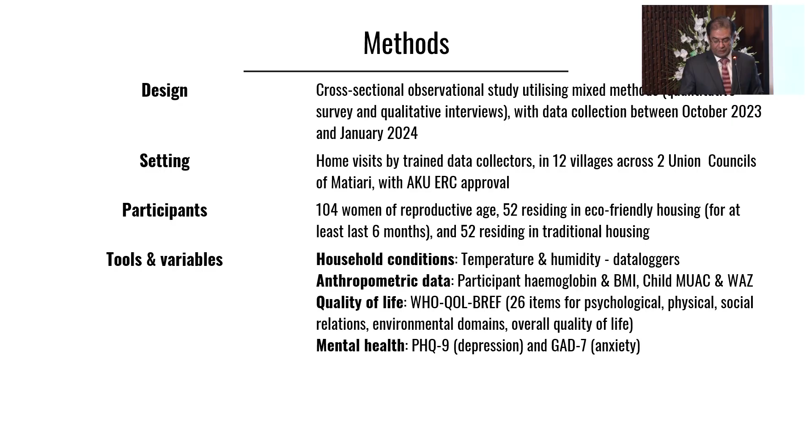What I'm going to be talking about is the quality of life indicators and the mental health effects of this. As you can imagine, we looked at it from an academic perspective, to really measure it in a robust manner.

So these are the surveys, some very standard surveys that have been done. For quality of life, we used the WHOQOL brief survey. This has 26 items for psychological, physical, social, and overall quality of life. For mental health, we had the PHQ-9 and GAD-7 surveys done in these populations. These are pretty robust tests available to see what the differences are.

And what we were very happy to find was that living in these houses really had a profound effect on the mental health in terms of the overall quality of life. As you can see, in terms of the statistically significant difference overall in the 4 domains, there was a difference.

In terms of the PHQ-9 and GAD-7 surveys, the depression and anxiety, the people living in these houses really had very clear mental health benefits. The people who were living in these eco-friendly houses, these 52, we were able to do more qualitative kind of analysis and really did some interviews.

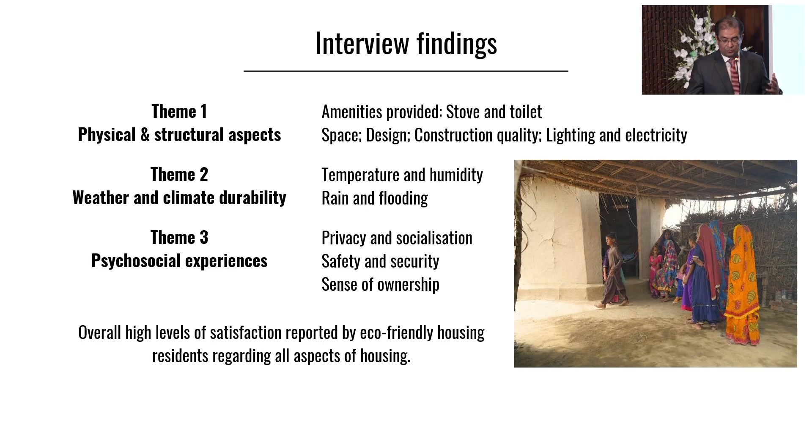And these interviews were along three themes: their thoughts on the physical and structural aspects of it, the benefit of this in terms of weather and climate durability, and the psychosocial experiences. What did they think of it?

The stove is good because the pipe takes all the smoke away, so there is no smoke around me while cooking. I'll remind you, the cost of this was rupees 500, less than $2. I have not used my old stove since I got this new one. I have no problems cooking now. There's no smoke and my cooking pots are not burnt.

We really needed a bathroom. This is much easier. Before it was very difficult for girls and women. There is enough room for 3 beds easily. It is spacious enough for us in good weather. Very good house, spacious, bright and airy, strong. It stays cool in the summer and warm in the winter.

The quality of materials used is good because we were there every step of the way. This was co-built with people. Now when it rains, we do not worry about what will happen because this house is sturdy. So these are some of the things that we take for granted.

So the sense of ownership of those juggies and those jhonpris isn't the sense of a home. This gives a sense of a home, which is a very big thing.

So overall, I mean, absolutely not surprised what will happen with 6 months of living in there in terms of your BMI, hemoglobin levels, and this. But otherwise, in terms of baseline characteristics, these things were not different in the two groups. However, they had significantly lower depression and anxiety scores, significantly higher psychological and other quality of life scores.

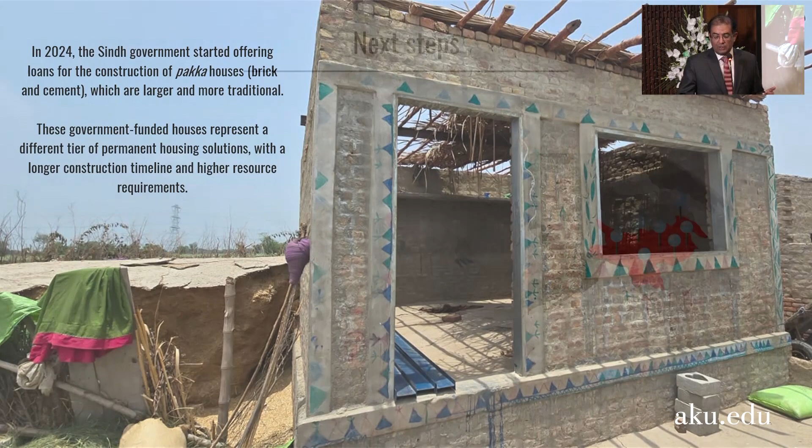When you ask people on the ground, they would rather have these pakka houses than the ones that they have. But the point is that the scale of the problem is so high that there is room for all of these solutions.

There are many lessons you can take from this. The scale at which you can produce them is fantastic. 60 to 80 houses a month - you'll find it hard to match that with any other design. The co-creation aspect is very useful, and the cost is very, very low - less than $200, which is what people would spend for a dinner.

You give somebody a house for 30-35 years, there is this huge kind of investment in there. So those are all advantages.

I know those pakka houses are very attractive to people. The government is committed, 2.1 million houses will be built and all - nothing against them. But the scope of the problem is very large, and there is definitely room for models such as these. There is nothing inferior in this. For the right setting, these have advantages over the pakka houses as well.

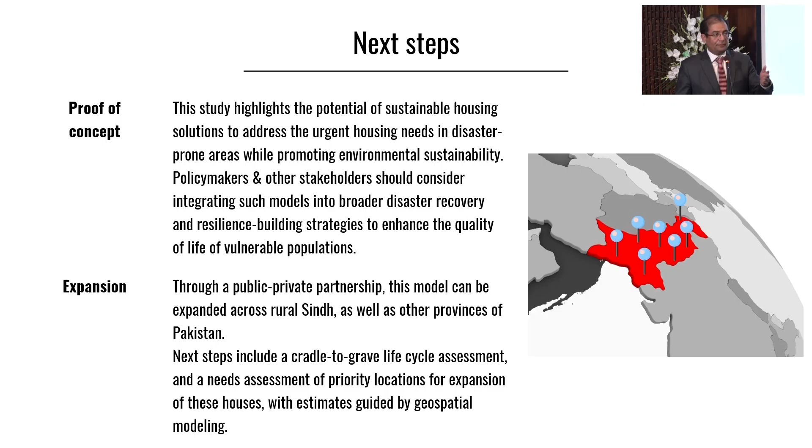So we are looking for ways to expand this. This is not our core field, but it has been a very good experience, and I'm grateful to Dr. Bhutta - I asked him for this opportunity to present this, given the title of this conference. I'm grateful for your time and attention. Thank you very much.